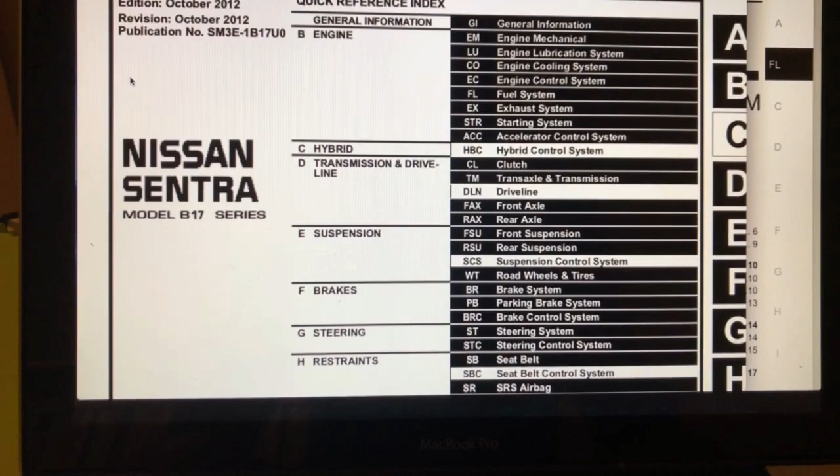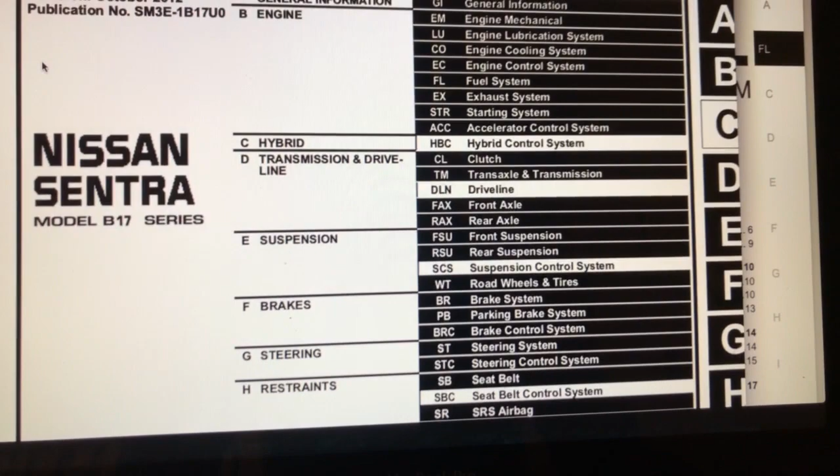Okay guys, this is the book that I was talking about that we're gonna be working out of. This book is for the Nissan Sentra B17 series, again from 2013 to 2017. This is what we're going to be using to do things right on your car. I know that there's not a lot of videos on how to work on these vehicles, but I have the book and I'll make those videos for you.

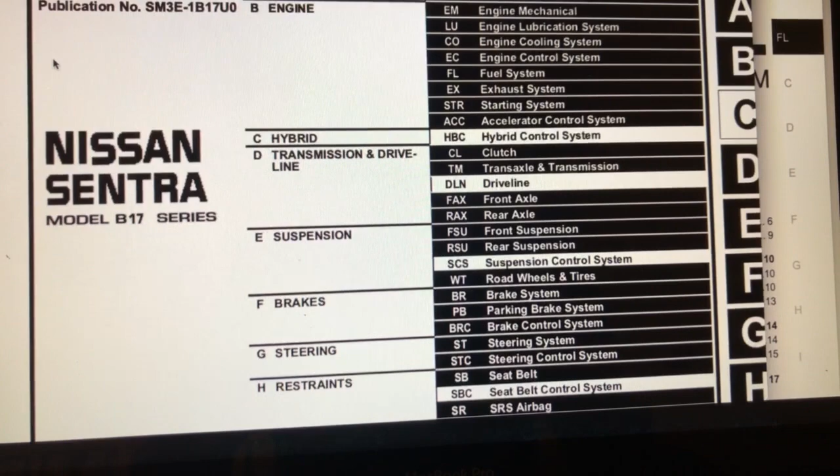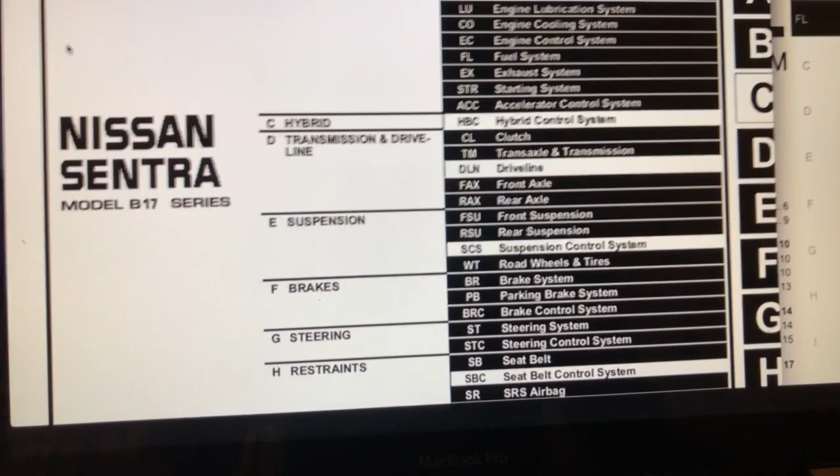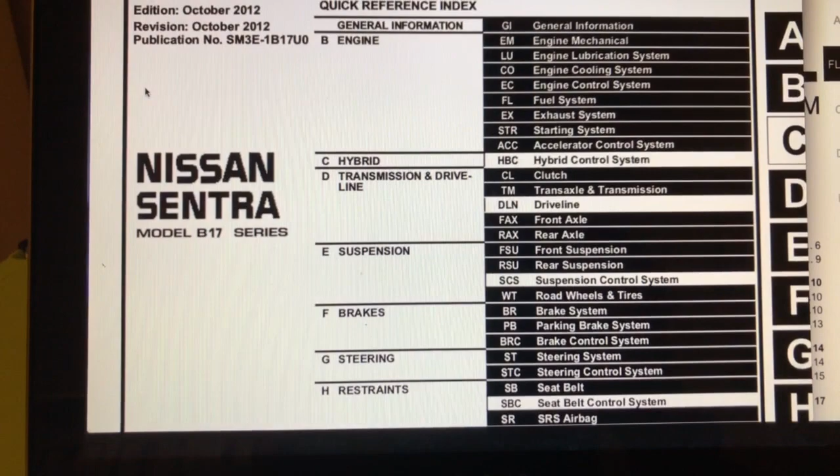I have to work on my car, and maybe you might be having the same problem, or if you just bought a new one, or an old one, and you're trying to work on it. Maybe you bought it from an auction and you're trying to fix it. Well, I'm gonna show you here how to do that. Right now, the problem that I have is with my fuel efficiency, and it's spending a lot of gas.

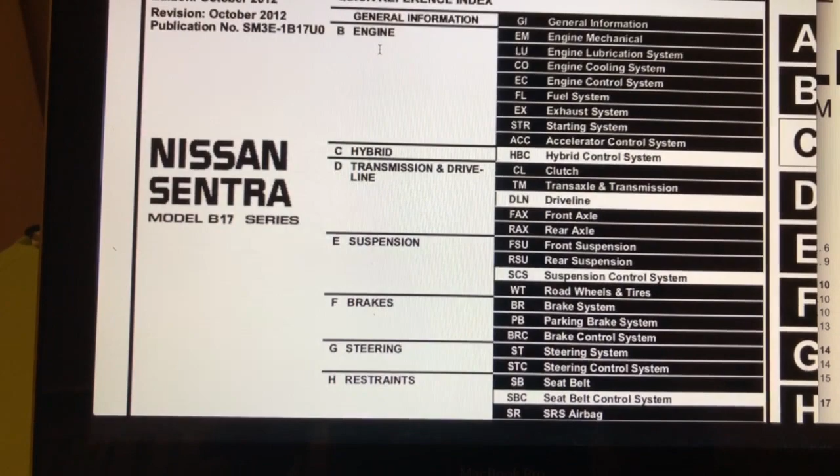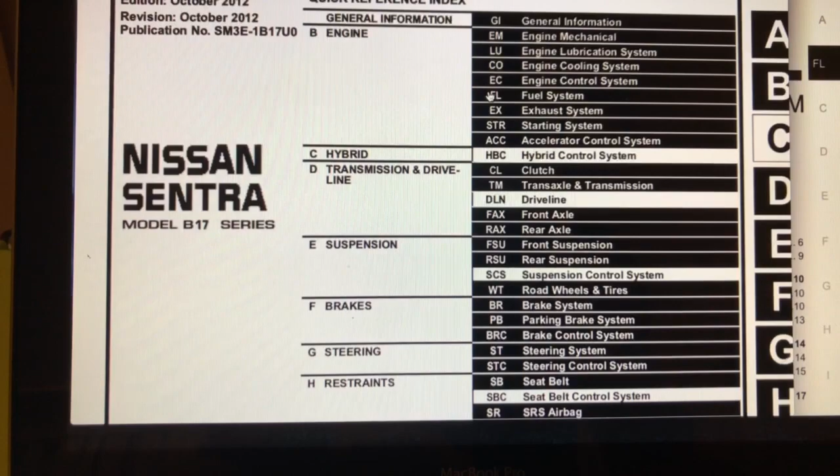You could have looked at other videos and it said to change the fuel filter, maybe the spark plugs. Well, we're gonna start with the fuel filter because they get pretty dirty. We're gonna start here where it says engine, and then we're gonna go to fuel system, and we're gonna check where that fuel filter is.

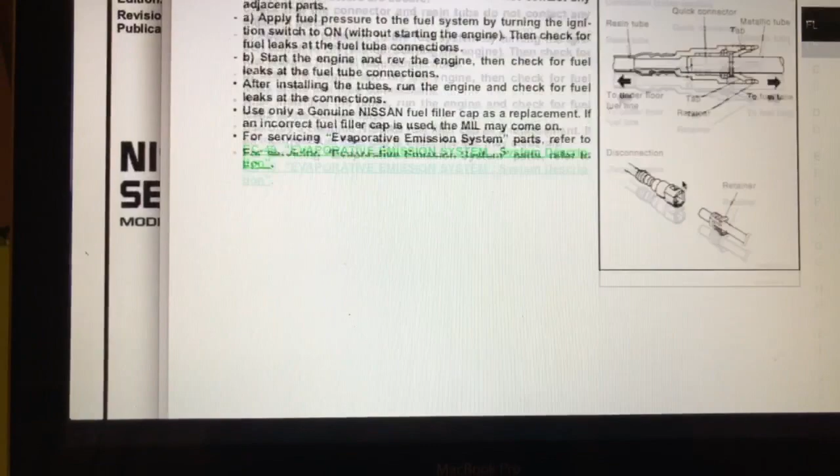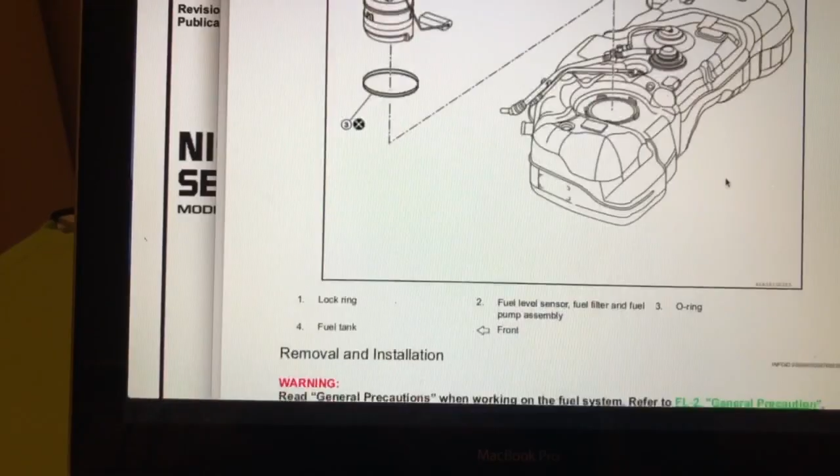So here we check, and well, we don't see anything really. It tells you how to work on it. There's your gas tank, and well, look at that right there. It says fuel sensor, fuel filter, and fuel pump assembly. Is that so?

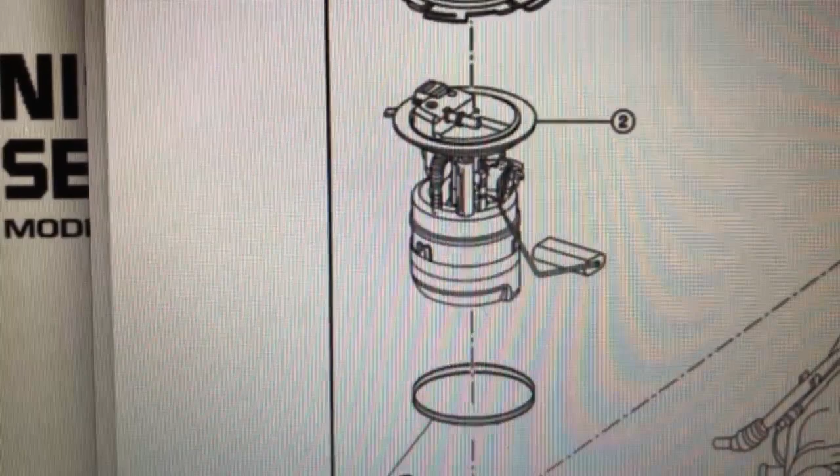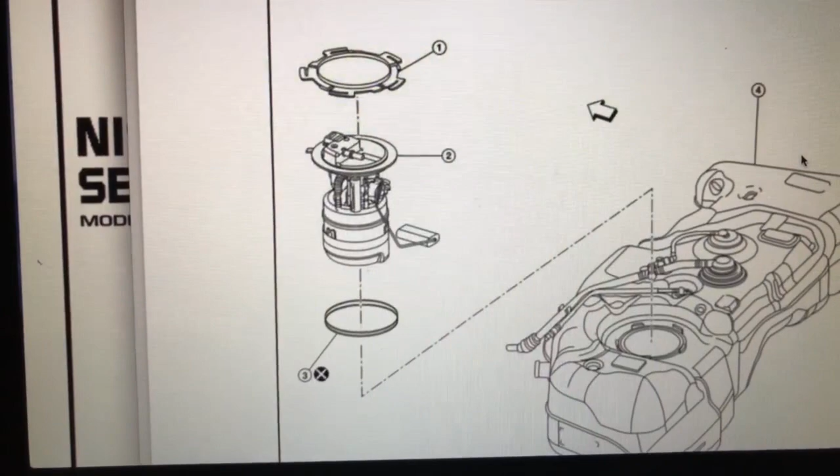On your 2013 to 2017 Nissan Sentra, your fuel filter is gonna be your fuel pump, and you need to change that if you're having problems with filtration or anything else that matters. So all we have left that we can work on, that won't be so expensive, is gonna be the spark plugs.

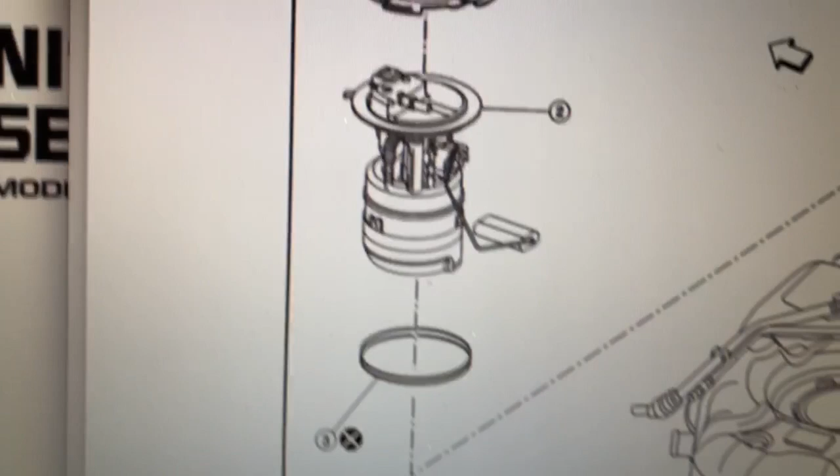So this I'm not gonna change unless you guys want me to. I can show you how to change it. I have the steps here and I can show you how to change it. So please let me know in the comments below. Thank you.